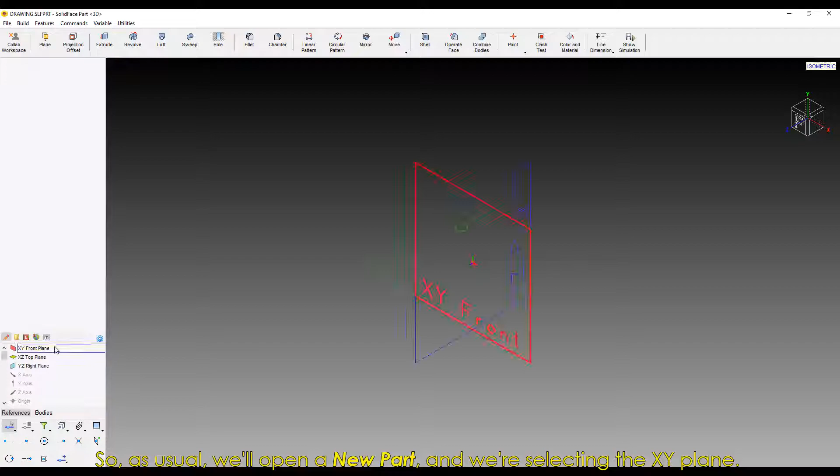As usual, we'll open a new part and select the XY plane. We'll habilitate the arc circle and create a circle on the origin with a radius of 12, then another circle on the same origin with a radius of 10.48 millimeters.

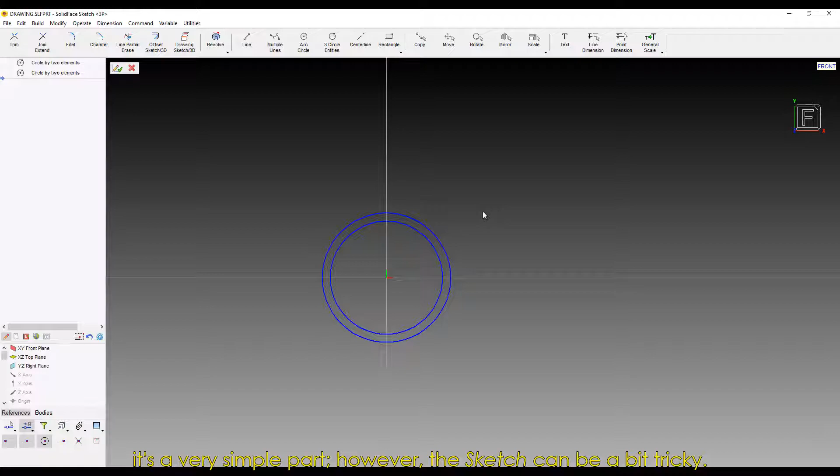Here's some advice: pay attention to details because it's a very simple part. However, the sketch can be a bit tricky.

Moving right along, we'll select the line tool and draw a line with an angle of 0 degrees and a distance of 8 millimeters from the center of the circle. Then we're creating another line with an angle of 90 degrees.

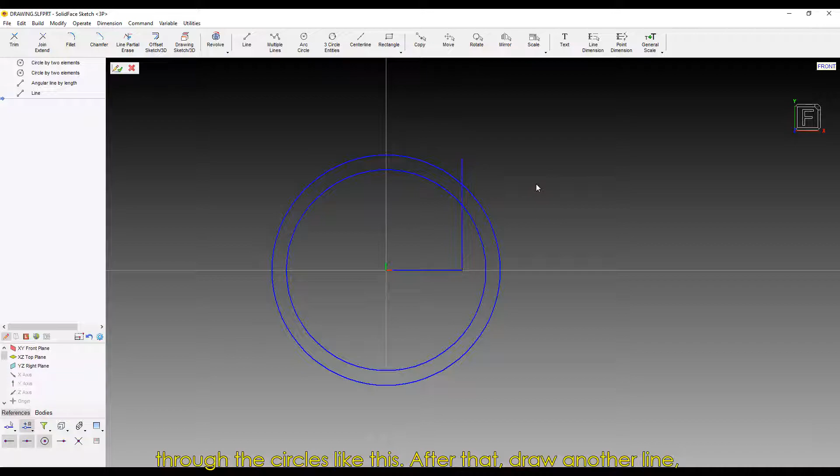The measure doesn't really matter, but it needs to go through the circles like this. After that, draw another line, this one with an angle of 180 degrees, going through both circles as well.

With our geometry closed, we just need to habilitate line partial erase and erase the lines we don't need.

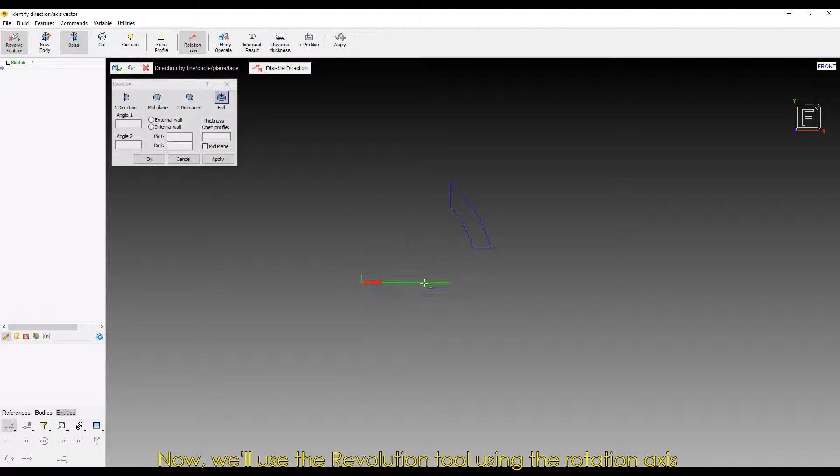Now we'll use the revolution tool, using the rotation axis and the profile of our part. To finish our part, we just need to alter the part's material to carbon steel.

And that's it. Now let's move on to our second part of the clamp: the handle. Opening a new part, we'll start with the multiple lines command on the origin.

We're modeling half of its profile and we'll revolute it later. It'll have 72 millimeters of length, 5 millimeters of diameter, and its radius will be 2.5 millimeters. Then a length of 8 millimeters, and we'll follow the geometry until its end.

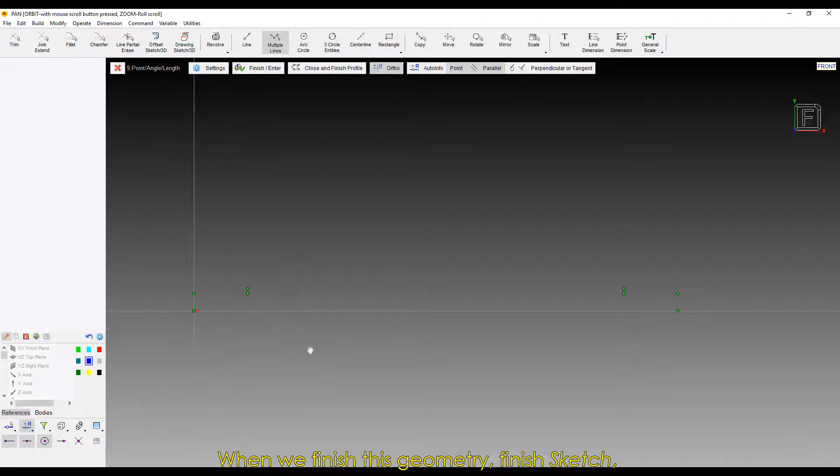When we finish this geometry, finish sketch and habilitate the command revolve. We're selecting the revolution axis and the geometry. We're almost done here. As usual, change its material to carbon steel on the Color and Material tab.

Another part is done here. Let's move on to the third and last part of our clamp, the handle's head. Start with a new part and add a circle with a radius of 6 millimeters.

Then we'll habilitate the extrude tool to create a part with 6 millimeters of length.

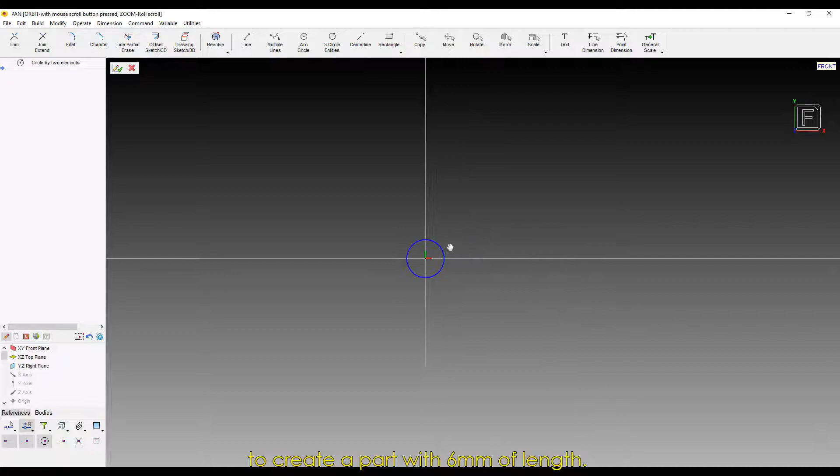Now habilitate the hole tool and select the countersink option. On the diameter tab, add the value of 8 millimeters, angle of 45 degrees, and 6 millimeters of length. To finish it, on diameter 2, add 5 millimeters.

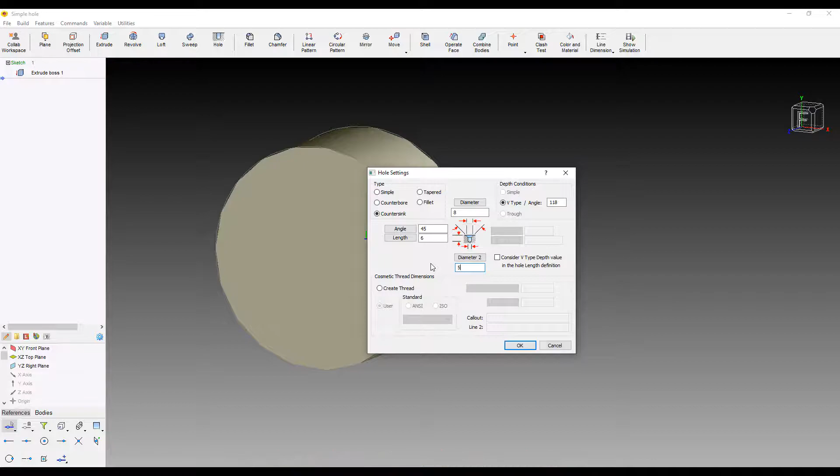That being done, click on OK. Select the operation start face and the center of the face on OSNAP.

Now we'll create its chamfers, selecting the chamfer tool. Select its second option and input the values of 1 millimeter and 45 degrees. All you need to do is select the edges that the operation will be applied to and apply it.

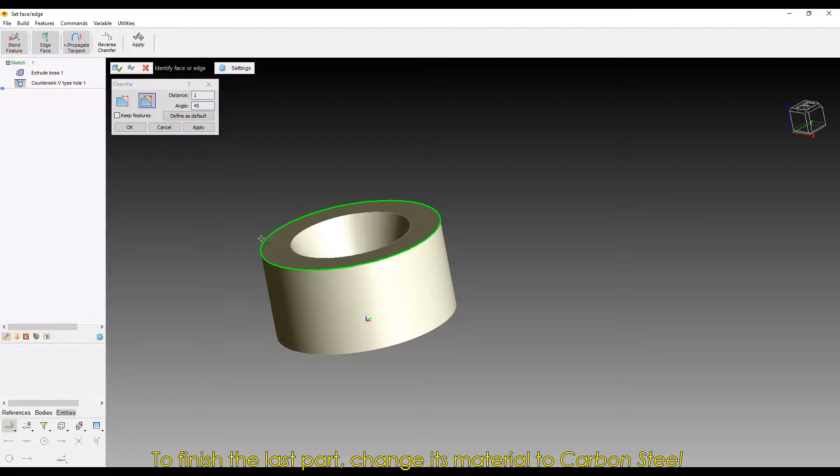To finish the last part, change its material to carbon steel on the Color and Material tab. And now we have a complete clamp set. Enjoy!